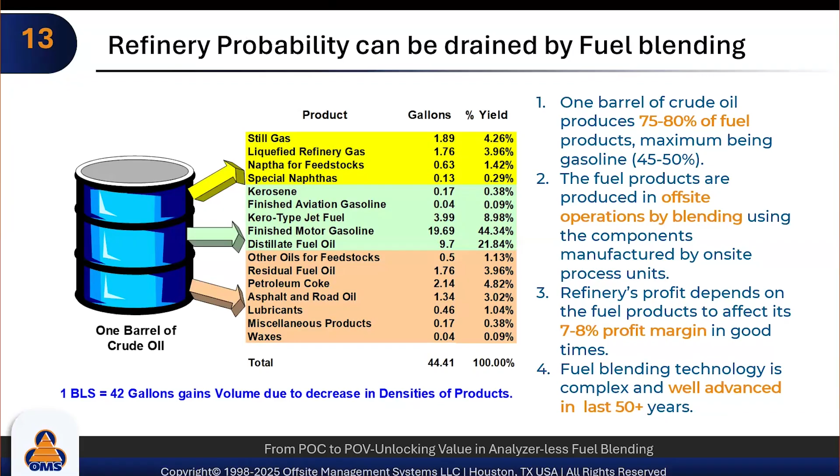The refinery's profit depends on fuel products, with a 7 to 8% profit margin. They don't make too much money. It's just 7 to 8%, and even a 1% loss runs in millions. Fuel blending technology is complex and well advanced over the last 50 plus years. But now we have seen the shift towards blending without using analyzers.

Let's take a typical blending system. Now, a blending system is not just one module. It integrates about 10 to 11 different kinds of sub-modules which are automated or not automated. It needs the information from the lab for the analysis. It needs the tank inventory information, which is connected by an automatic tank gauging system. Then there is an additive control system. It has field equipment instrumentation like control valves, flow meters, switches and other things.

And then you go to the DCS, which can be any. On top of it, an advanced control system sits, which is 3 layers: regulatory blend control, online blend control, and offline blend control. And they all work in sync. During the blending, it goes to the blend header and then to dispatch by tankers, pipeline, trucks and rail wagons. So every step or every sub-module that you see in the diagram is subject to automation.

If, for example, the tank farm does not have an automatic tank gauging system, it's a manual type of measuring where the operator goes to the top of the tank and dips it, and so if that is the case, the blending will not be automated because it has to wait for the tank level, or there's a risk of overloading.

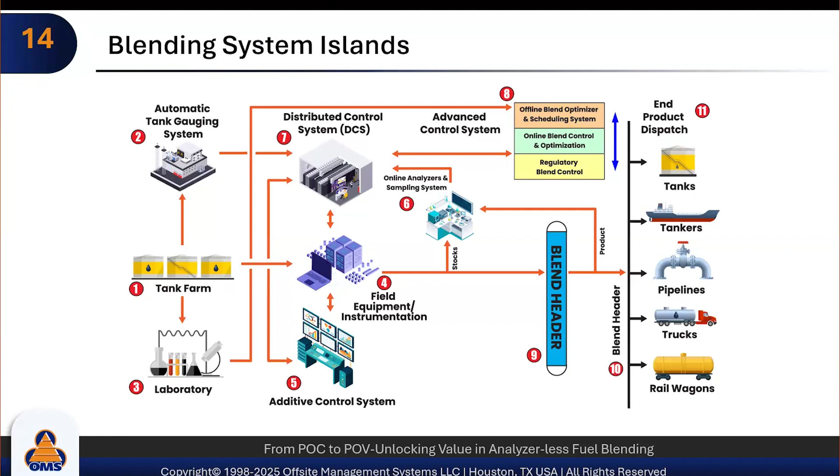So now we focus on a golden infrastructure blending system. On the left-hand side, you have the component tanks. Typically, component tanks should be two: one for running the blend and one which is feeding from the process units. Now, in my 40 plus years of career in this industry, I have not seen any refinery, except one or two, which have 2 tanks for the blending configuration.

So what happens when you have 1 tank only for each component, and that tank is receiving the process streams and also blending? It will change the component qualities. And you cannot put the analyzers. Refineries could put the analyzer at the outlet of the tanks, but it's too expensive, so they don't put it.

So what happens? They make a guess. And when they make a guess, the recipe changes randomly. It's not controlled by the component quality. So then it ends up in quality giveaway.

On the header side, there is also an online analyzer installed, maybe one, which can be multiplexed, which can measure the quality of the component tanks or just the header. Some refineries don't even have that one, or if they have it, it's not maintained, it's not working. So again, the same story goes, the blend is given away, and the refinery loses the money.

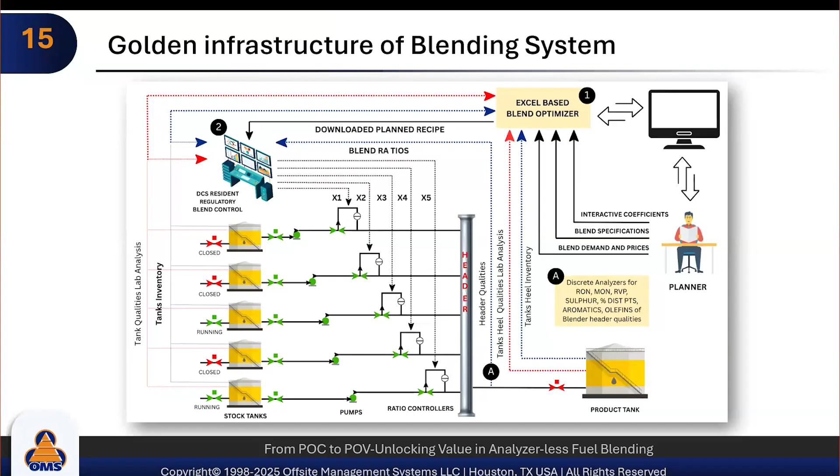So these four components are very, very essential for a refinery to not keep on losing millions of dollars every year on blending, but capture quite a bit of it. And we'll talk more on this. So this whole study is around how can we measure the qualities of the components in real time? What technology can we use? AI, ML models. What technology can we use to predict the quality of the header without analyzers? And this technology is all about an analyzer-less blending system.

So why does a blending system fail to perform? We have dealt and discussed with many refineries. There are many reasons: the tank farm automation, the field equipment, blend header, analyzers, blending operations, and blending control. If they have analyzers installed, they are not configured properly, not maintained properly, not modeled properly. So over time, they are just abandoned, and then they go back to manual operations.

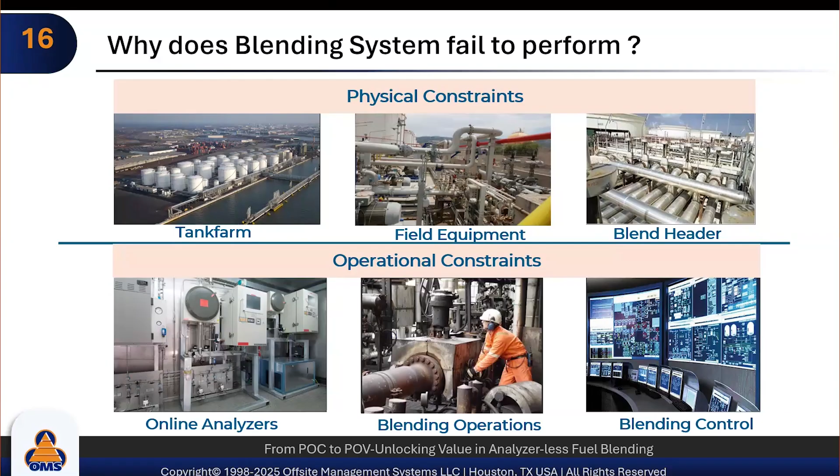Now, all that I'm talking about is not a fantasy, it's not fake, it's real; this is happening in the industry today. And if you look around and talk to your industry peers, you'll find that they are having problems with the analyzer, with the operation, with the control system, and at the end, it results in a giveaway.

So what are the key challenges in the blending system? First, the analyzer, as I talked about it, is reliability. They suffer from drift, delay, breakdowns. Impact is you have incorrect quality feedback, off-spec blends.

The component quality variability. Now, in this case study for this particular refinery, we have analyzed the component qualities, and it varies all over the place. And if it varies all over the place, when it's fed to the component tank, the quality of the component tank will also vary all over the place. And when that happens, and you don't know what the quality of tank is, your recipe will be all over the place again. And if the recipe is all over the place, you cannot meet the spec or giveaway.

Then tank and line contamination. This happens when you don't have the correct equipment, which is automated, like changing the line, starting the pump and switches. And again, it can result in giveaway or off-spec rework. Recipe execution accuracy, how accurate your recipe is, how well you have planned it, what model you have used. Then it results in recipe violation and economic loss.

Inadequate real-time monitoring. Blends, they don't have an online blend control system. They have just offline control, offline optimizer, which is again used by Excel, non-linear models, and then it's just ratio control. The recipe doesn't change over the time, and quality of the component is changing. So you see, a lot of things are happening, and they miss the opportunity for corrective action. There is no correction.

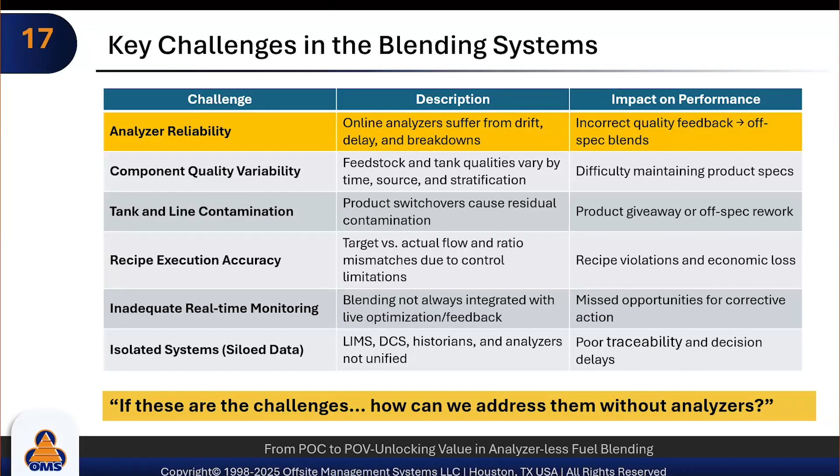Isolated system. There are too many databases, lab system, DCS, historians, analyzer, and they are not together. They are not unified. The idea of digital transformation is there. People recognize it, but they don't practice it because it's too much work, and refineries don't really understand. Not all refineries, but the majority of them don't understand what's the implication of that on the blending system, and therefore the profit of the refinery as the bottom line.

And I will go a little further. I said, if you lose 0.1 octane giveaway, say for example, for a 100,000 barrels per day refinery, it amounts to about $30 to $40 million, which can be achieved. And the ROI is typically between 12 to 18 months at most. So rework, cost, and slop generation degrade profitability.

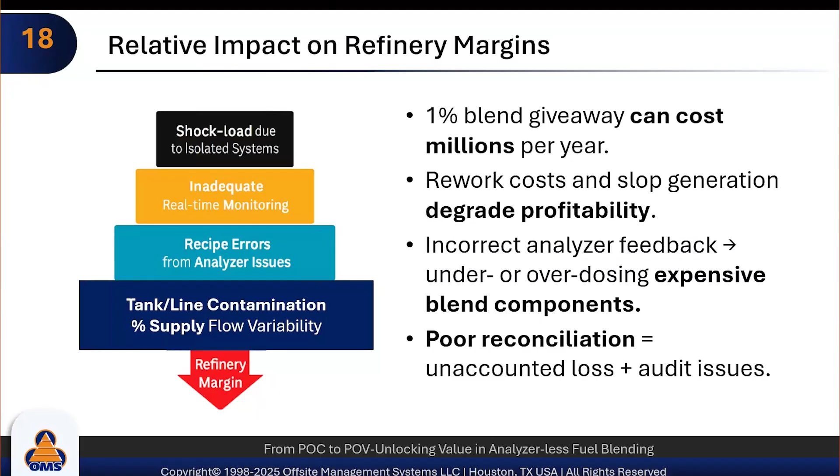Incorrect analyzer feedback. Now, refineries install all kinds of advanced analyzers like NIR, multiplex, and other things, but if we don't maintain your analyzers, if we don't model them frequently, the analyzers don't work. And over the years, what happens? They drift away and they are just abandoned. Poor reconciliation, unaccounted losses, and audit issues. This all affects the refinery margin.

So, are the analyzers the weakest link in the blending system? In our view, yes. Because it affects the giveaway, it affects the manual adjustment, delayed response or lag, calibration drift, frequent breakdowns, mismatch with lab values. So what can we do? Yes, we can use an analyzer-less blending system using AI models. And this is what we proved in this case study for a Latin American refinery.

So what's the difference between the two? A traditional system, as I said, uses online analyzers with the component flows. It measures the quality of the components if it is installed and multiplexed with the component exit point, or it just measures the quality of the header. Then again, we still have the problem for quality of the components.

The analyzer-less blending system has no analyzers. What it does, it measures and predicts the quality of the header by technology, by models, and it uses the historical data and sees, can we use information available for the blending equations, the blending models, component flows, quality, etc., and it predicts it. When it predicts it, then it compares with the qualities which are measured by the lab and feeds back, and it trends, tests, and predicts.

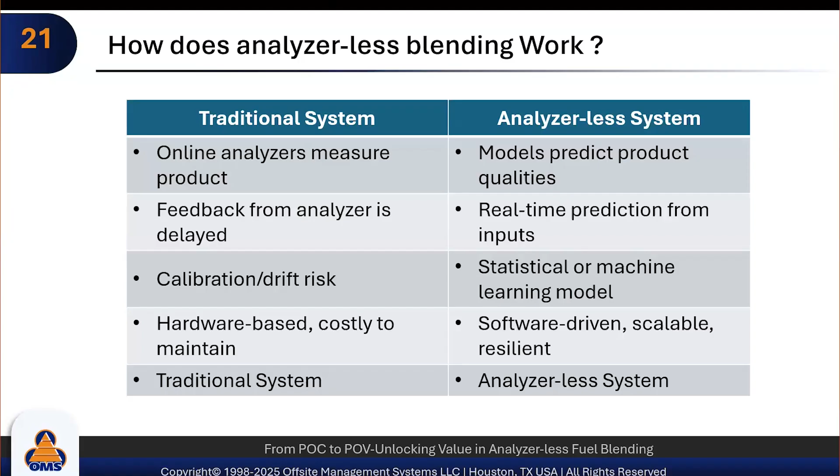So again, a difference between the two systems: analyzer-less blending uses historical data. It has to have data, and the better data you have, the better models are created and developed. Component property, that's the biggest factor. We all have it, and I'll talk a little bit more on that one. AI or linear blending models trained on past blends, live data feed from DCS, process historians, and we can have bias stabilization logic using a lab/tank feedback.

The benefits are there is no hardware maintenance, no calibration required. It's a very fast response, less giveaway, robust during analyzer outage, across multiple refineries and blend types, and with backcasting validation.

One of the biggest advantages of this is the crude switch. Now, if the crude switches and you have online analyzers which are working well, you have to retune the online analyzers. You can also use AI-based online calibration of analyzers nowadays, but this analyzer-less, lab-based system tunes itself. It detects that component qualities are changing because of the crude switch, and then it learns and corrects itself for the crude switch.

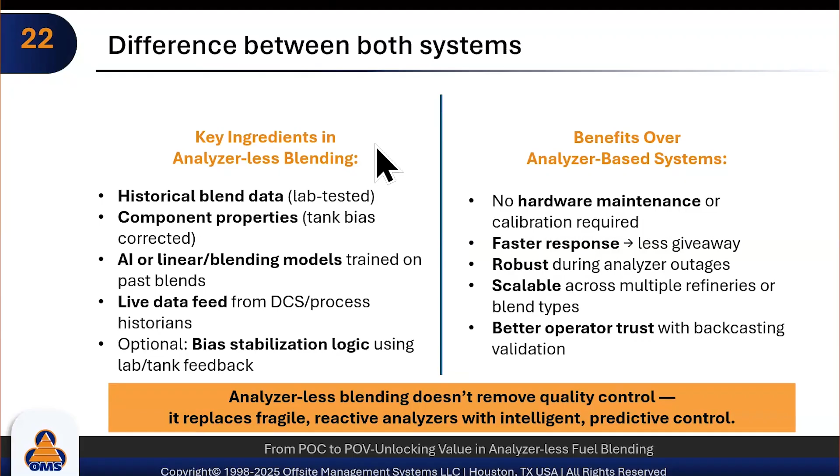So POC to POV. Now we have talked about POC. Then the question comes: is this POC really workable? Does it really make money for a refinery, or is it just a concept in theory? No, it's not a concept in theory. It works, and that was the main point of this case study that we have done. Okay, we have seen that the POC, the concept, works. Now we have to translate that into value, proof of value.

So we have answered the question, can the model work in theory, using the historical data, the testing model, different kinds of calibration, correlations, you name it. But when it comes to proof of value, we have taken those models and relived them through the blending optimization. And see, with these models, if I do it correctly from the beginning, does it create a better recipe? Does it create less giveaway? Does it give the money to us?

So for example, if you're doing a manual blending operation with a ratio controller, and you take the profit from the blending product value minus the cost, say you make $10 million, but there is no optimization. The value of this POV comes into the picture: if we take the same blend, same recipe and optimize it using the blending optimizer, nonlinear models and AI and ML, how much money do we get? So instead of $10 million, if we get $15 million profit, that $5 million is the POV for your proof of concept. And that's what we have done in the case study. We have integrated the two together, POC plus POV, to show it not only works, but creates value.

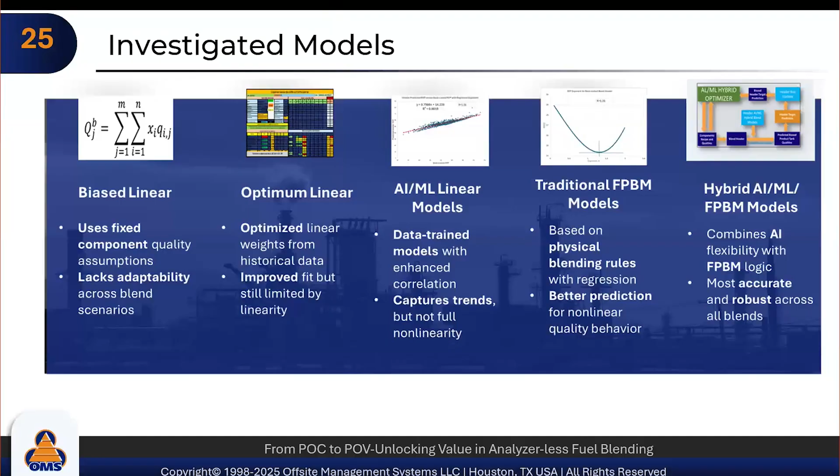So from component to product tank, we start with linear blend models, which have as input all component tanks, process streams, process stream flow rate, tank volume, etc., and then integrate it and predict it. Now, we have also done the prediction of component qualities, which is not a part of this webinar, but maybe in future: how can we predict the qualities of component tanks using the quality of the process streams, which is done by lab analysis and not continuous analyzers, and the flow meters. And we have predicted the quality of the tank on a continuous basis. And it's a surprising result that we found.

Once that is done and optimized, the model predicts, and we measure it against the lab qualities. And then it trains itself, integrates, predicts, and goes back again. So it's a continuous loop from steps 1 to 3. And this is online, without human intervention. So the model is predicted, trained, tested, and ready for the next one. So we have used these whole 3 steps in our case study, to see, if we deploy this in a real plant, what it will look like. And I'll tell you how complex this computation is in terms of computer time.

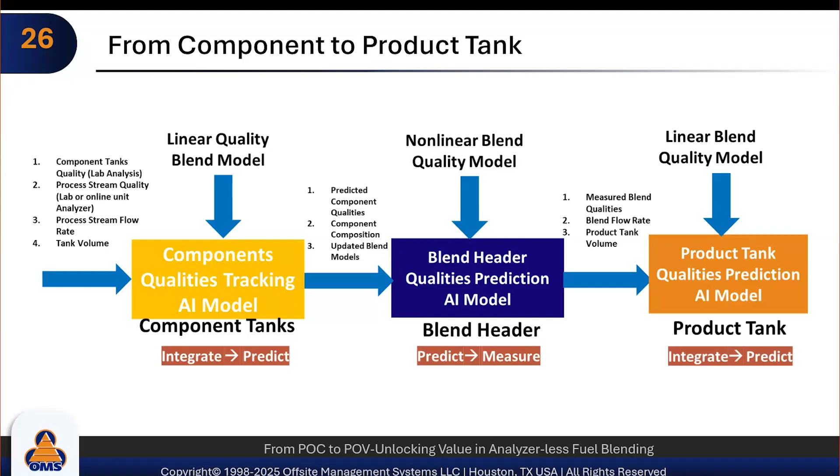So the roadmap for the POC is we do the data collection, and Francisco will talk about the data collection, and then we do data analysis, historical data consolidation, header and product tank qualities, and customization of blend models. Now, the blend models, also called first principle blend models, are very specific to each refinery because of the components, the process, and some of the salient features of the refinery infrastructure. So we have to customize each of the nonlinear models, whether for octane, for RVP, and other things. And they are done online, and it regresses parameters as we blend more and more over time. But we started with the historical data.

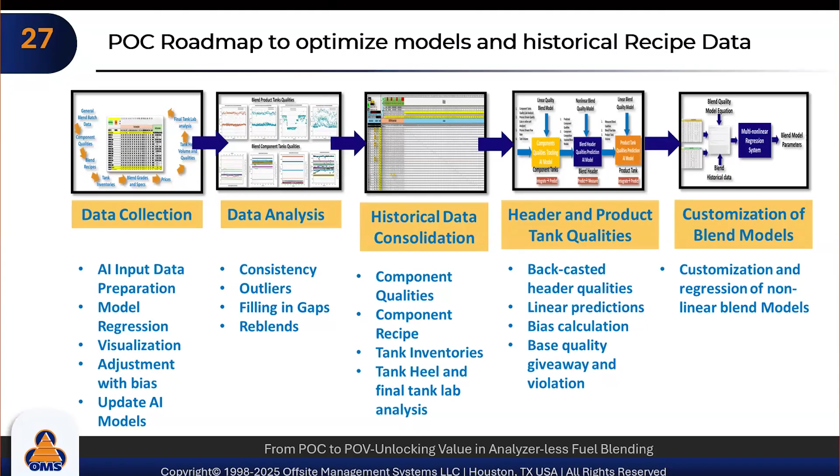Then it trains the linear AI model and the hybrid model and does the recipe optimization. We have used the Excel-based nonlinear optimizer, which takes each of the historical 825 blends and optimizes the blend. So what if the refinery had optimized the blend with a different model, what would have happened? And then we predict the blend qualities, and then we analyze the quality giveaway.

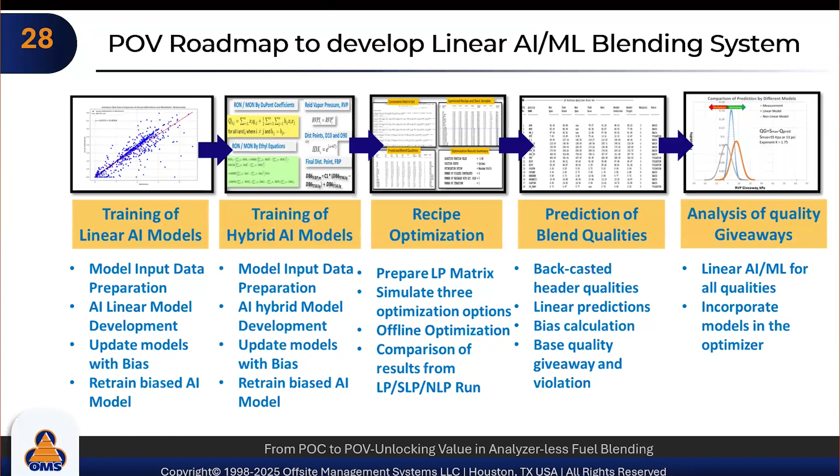You can see the shift of the bell curve from widespread to narrow as we optimize it and as we do a better prediction of the blend quality. And this is again from using historical data. So that was the proof of the pudding, because unless you use historical data, how would you prove this technology?

We have used a very detailed procedural flow to develop the AI ML model. It starts with the backcasting, it starts with the component qualities, and it goes through 11 steps, and it calculates the average bias, bias RMSE, which is root mean square error, and the bias convergence, and then goes back again for the next iteration. So even for the same blend, for the same model, we have to reiterate until the bias is stabilized, until the RMSE is stabilized.

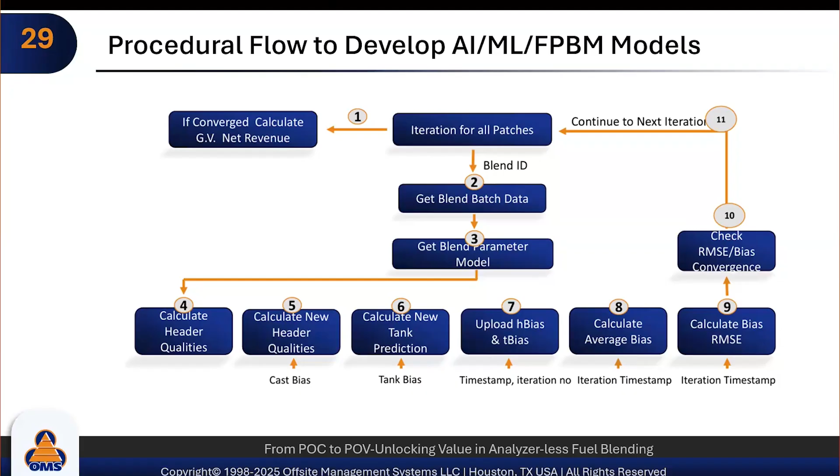And we have seen the pattern that during the iteration of the same model or same blend, it stabilizes over time, and that becomes our stable bias. And we have done this for each blend model, for each of the 825 blends that we had in this study. Now, what's the financial impact?

Now, typically, you will think that my financial impact is gross profit and loss. I know the price of the product that I sell, I know the cost of my component, and the difference between the two is my profit or loss. Yes and no. It gives you only one factor of your earning, which is profit. What happens if you lose the quality, if you give away or you have violation losses, which you reblend?

That also has to be incorporated in your profit and loss, which is on the book, the financial corporate book. They don't consider that. They just put only gross profit and loss, and they say, okay, either we lost money or made less money. But in a true blending system, we have to take the cost of giveaway and violation. So in this study, we have taken three factors.

We have taken maximum profit, which is the traditional, and then we say what will happen if I just minimize giveaway. And traditionally, a planner plans the recipe based on the maximum profit scenario. When he goes to refinery level, the refinery control engineer goes to the blend minimum giveaway, because his role is, I want to minimize my giveaway. I don't want to become a red mark on my performance review that, hey, you lose money on the blending.

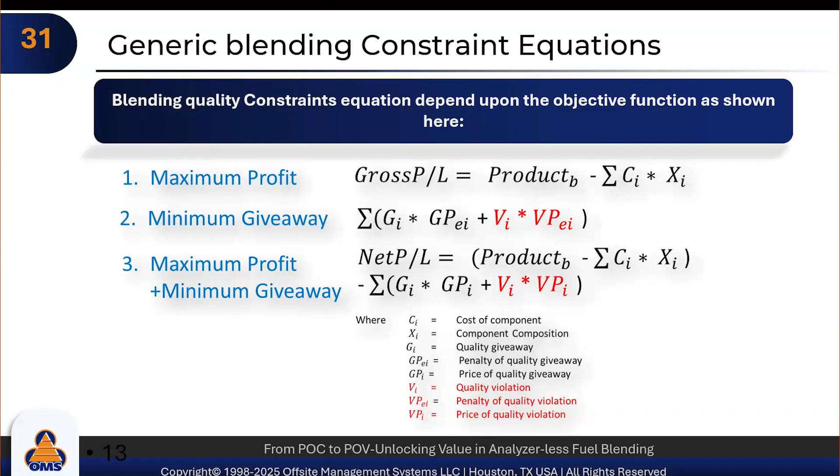So maximum profit: the primary goal is profit margin, blend margin of profit. This is what goes in your balance sheet in the corporate book. This is a much simpler revenue calculation, but you can also take the cost of the blend components. If you're working for a refinery, knowing the cost of the blend components is not easy. Accountants do a lot of calculations. We have also devised a method by which those costs of the components can be backtracked from the historical data, and there are different approaches.

Then you go to minimum giveaway. At the refinery level, the goal is only to minimize excess quality above the required specification. Say, for example, if your octane specification is 88, your approach is to go as close as possible. As a control engineer, that's my only goal. Whether he makes money or not is not important from my point of view, but I want to minimize it.

Then the person comes who thinks like a planner and like a blend control engineer. He says, okay, I want to have the best of both worlds. So we balance profit maximization with giveaway reduction. We combine both equations mathematically and optimize, and we come up with a better result, giving the best of both worlds. So how did we do it?

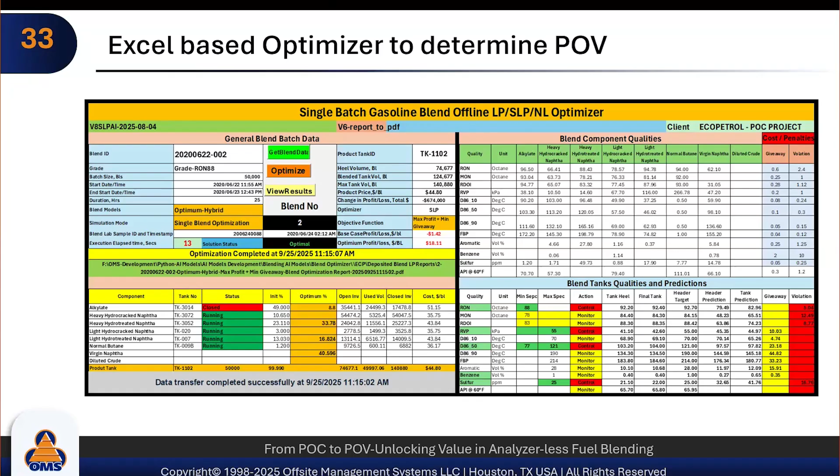For this case study, we developed a very sophisticated Excel and Python-based blend optimizer, which takes many parameters. You can control which model to use, whether you're doing single blend optimization or multi-blend optimization, what kind of profit margin, what kind of objective function you have. You can manipulate all these things, and all that data is coming from historical data of thousands of blends, and it optimizes. Optimization is very fast, only 15 to 20 seconds per blend.

You can see that we control this. I call it the blend optimizer control room, where you can specify what kind of model I want to use, whether single blend optimization, an optimum hybrid model, what kind of architecture, integrated SLP and AI, successive linear programming and AI, and whether I want to use all three options together or multiple. This is where a control engineer or operator at the console in the refinery, or even a planner, will configure this.

You can optimize in bulk, like 825 blends, or you can do one at a time, or plan a new blend, or do what-if study simulation. So this interface gives all the options available. Now, this is only the concept, based on Excel and Python. We are in the process of converting this to a web-based system, since Excel is not a system that can be used in a plant environment. So OMS is developing the web-based system to do the same thing.

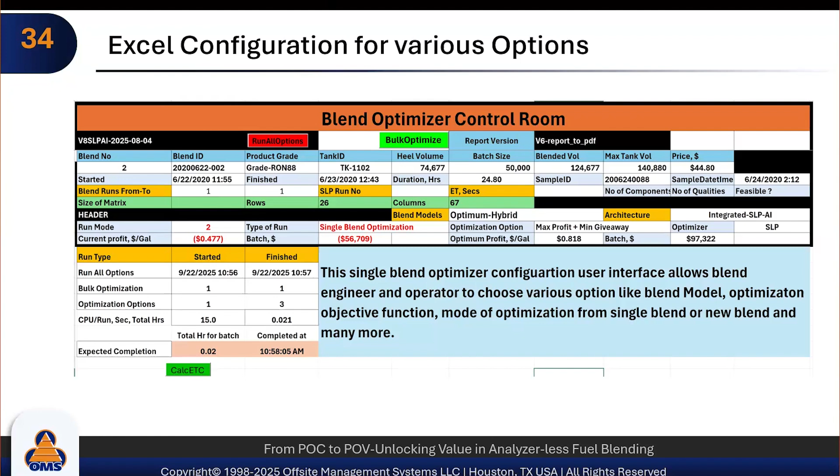So historization of KPI analysis. Once we have stabilized blend AI, ML models and we give the optimization option, we can use blend bulk optimization, the historizer, and the KPI analyzer. To give you an idea, we have 825 blends, each blend takes 15 seconds, and we have three optimization options. It takes about 20 to 25 hours of computer time continuously, only because we wanted to produce a KPI for all the historical blends for this POC and POV. It was quite a task for five blend models, three options and 825 blends. So you can appreciate the effort that has gone into this.

So this is another view of validation. We take the ratio and the quality and we do model development, feeding 4 or 5 models. Once they are developed, we do the header quality prediction, which is analyzer-less. Then we do the final quality prediction of the tank, compare the RMSE of the lab and the prediction, and create a KPI matrix.

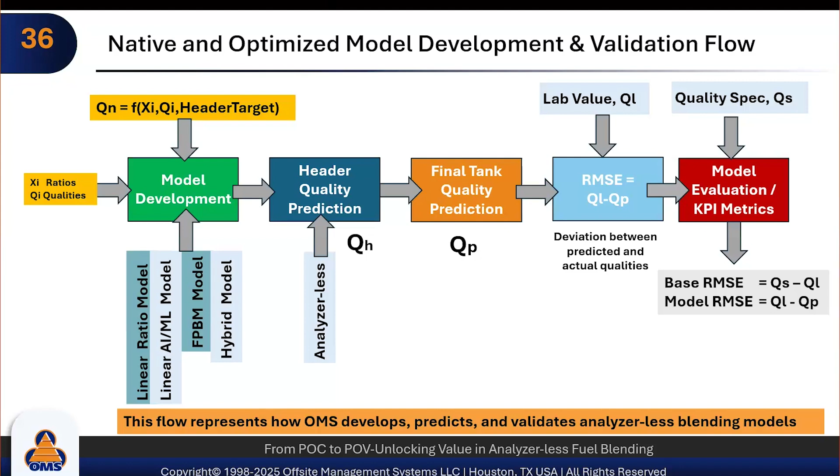Now the base RMSE is the spec minus the lab quality, and the model RMSE is the lab quality minus prediction. So it's a different view of how you look at it. But we have compared this RMSE for all the models for all the options, and the results are fantastic. Now you can see the RMSE of native and optimal model.

Now I will hand over the next few slides to Francisco, who will talk about data collection and issues with the data. Francisco, you're on. Okay, thank you, Dr. Suresh.

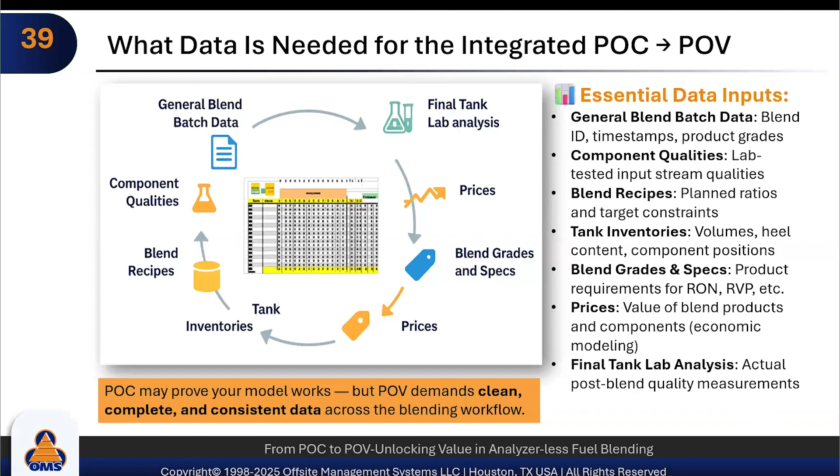So with this type of analyzer-less blending system, as with other data-driven AI solutions, we use rigorous data reconciliation and optimization tools that face two main challenges. There are operational barriers associated with data handling and difficulties associated with data structure. We are going to talk about each one of these, and also some additional challenges associated with the project team and management that became a barrier to the success of the POV. Next, please.

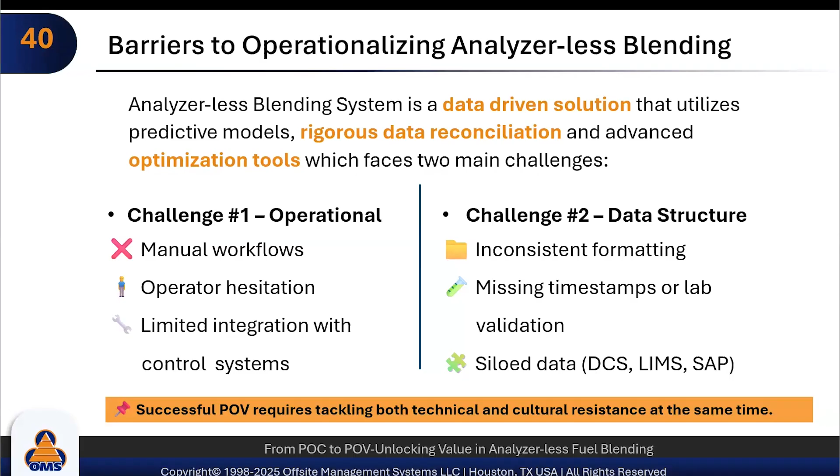Yeah, so part of this data handling challenge is the limitation to extract historical data from diverse systems or databases, and the lack of synchronization between these tables or databases that were not prepared to be looked at as a whole complete system. And this also covers the many operational data, actions and procedures that were not recorded in a digital manner.

So talking about the other challenge, regarding the data structure difficulties, next slide, please. There were different formats and conventions of the data, connections between systems and databases, and missing or invalid quality data. In general, there was not really a standard registration of all the blend information. So this all became a very big challenge to the POV. But what have we done? Next, please.

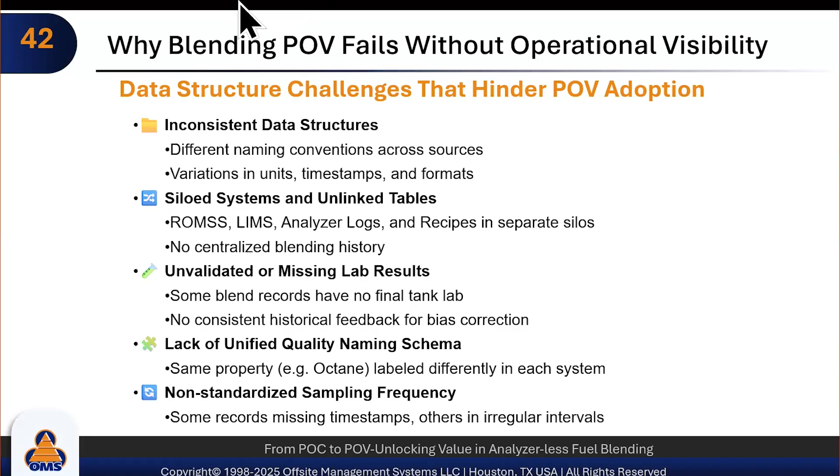So for this reason, one of the biggest efforts to carry out the POV was the preparation of the data for modeling, which involved mainly 4 steps. The first step was to unify labels in one specific language, and then clean and normalize the information of the data. And third, synchronize this normalized data. So at the end, we could integrate the dataset sources. There were more than 25, in a unified master data set to really start modeling and try the different models that Dr. Suresh just mentioned. Next, please.

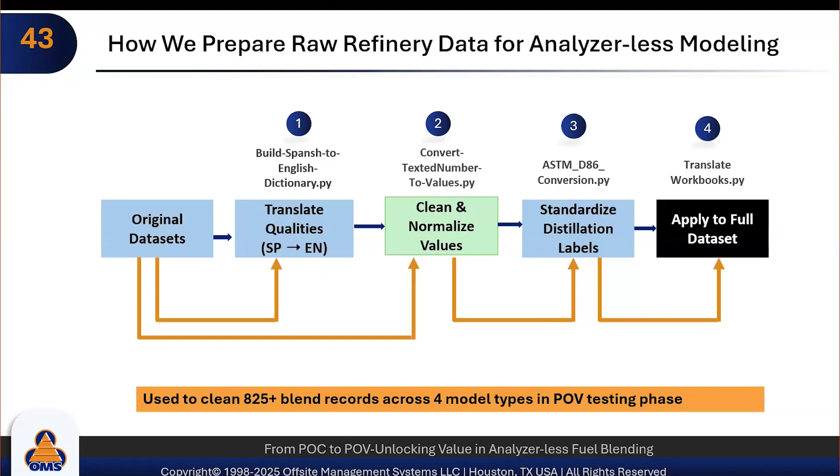So we can say that for data readiness for a blending AI application, we have to focus on 4 areas. First, localization, which is standardizing the files, the data and the language that is being used. Sanitization, where we have to delete all the outliers and normalize and make the data more consistent. And of course, the synchronization of all the historical data. The last area is we have to learn about the configuration and the specification of the system we are working with. So these are the main areas to prepare data for the modeling that we want to use.

In general, this requires governance to establish some rules and responsibilities for the data quality and validation, which is key to this type of solution. Next, please.

Additionally, I want to talk about a non-technical aspect that also became an important challenge to the POV success. It was the barrier that arose in the relationship and interaction between the working groups. First, some misunderstandings occurred due to gaps in communication. The differences in cultures and mindsets also prevented better teamwork and collaboration. And in handling this type of project, we cannot use conventional project management, because these are more technology development projects.